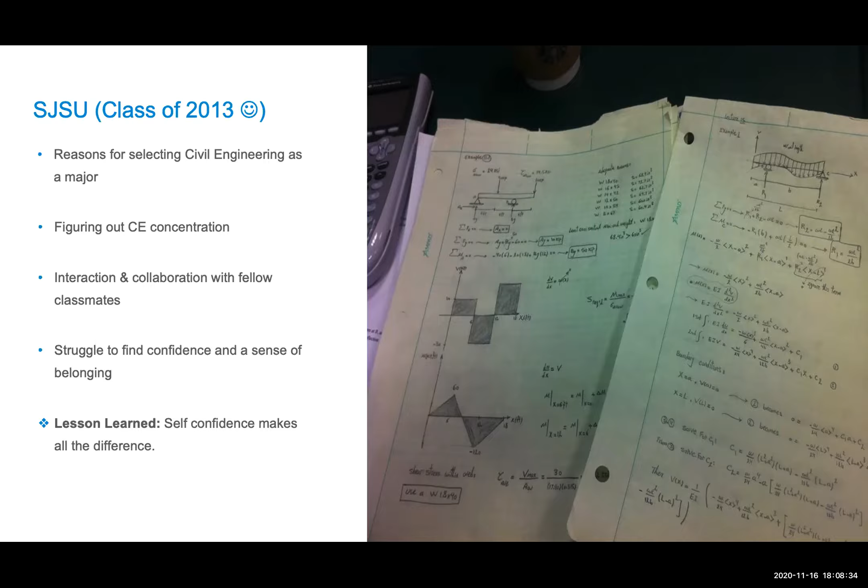Just to be completely open and vulnerable, that lack of interaction really resulted in me having pretty low self-confidence and a sense of belonging, which impacted my attitudes towards my studies. I would just come to school, get my stuff done, and go home immediately right after. That's why I put the biggest lesson learned for this slide: confidence makes all the difference, whether it's at school, your career, or generally in life. There are easy steps where you can start developing that self-confidence.

Let's talk about how I started building that self-confidence and sense of belonging, which is actually kind of a funny story. Finally, I decided to take an elective in construction, with Dr. Pian, CE 242 or 140, one of those classes where I really enjoyed all the different concepts we had, from earned value analysis to CPM scheduling.

That same semester, one of my classmates, who was president of the AGC student chapter, asked me if I wanted to join the organization and take on a leadership position as events coordinator for the club. My thought process was, hey, why not? At least I'll get to put this on my resume and it'll look good when I want to go get my full-time position.

So I started really attending all these different events, like volunteer events with Rebuilding Together, Habitat for Humanity, where we helped with minor construction work on homeless shelters, which was a pretty rewarding and eye-opening experience for me.

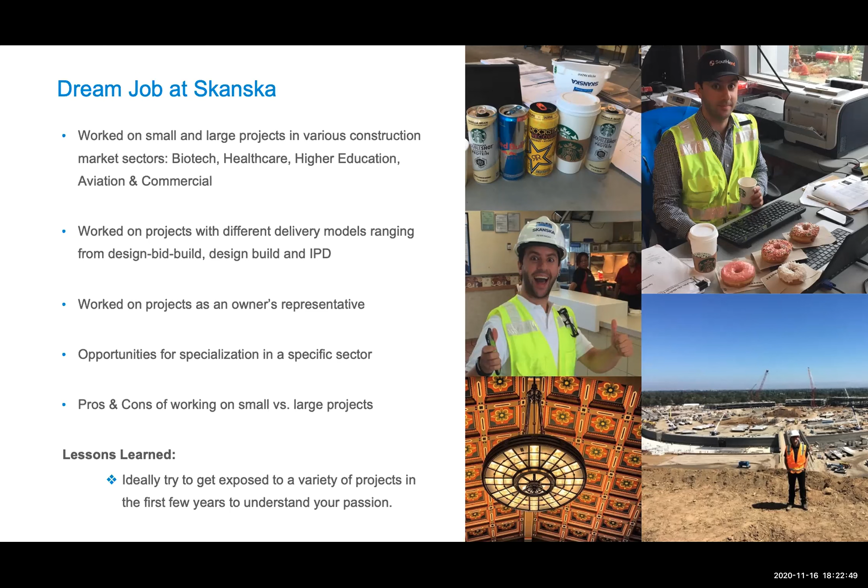Ultimately, what I want to say is being in the field and working in construction is definitely a super rewarding career. You can see from the images at the top, there's often a lot of donuts and caffeine involved, which makes it pretty fun. But aside from all the jokes, it is super rewarding to be a part of the construction industry and that process, and at the end of the project, be able to see the end result and the entire structure or building coming together.

All right, one more slide and we'll get to the construction technology side of things. In this slide, I do want to take a quick moment and reiterate the importance of networking, probably for the 18th time already, and developing those connections early on in the industry.

Because it'll not just help you land that internship or full-time position, but it'll also help you get ahead when you get into your first full-time position with your construction company. So when I had the opportunity as a student to go to all these conferences and hang out with people in leadership positions, I was able to get the confidence to not be intimidated by people in executive levels or the C-suite.

So for example, I had the courage when I started working at Skanska to really go up to my chief operating officer or executive vice president and engage in conversations with them and seek their mentorship. Through that, we were able to develop really long-lasting friendships, which even to this day, now that I'm not even with the company, we grab lunch, play tennis together, and I get to pick their brain on technical topics, how to navigate tough situations at work, and how to ultimately become a better leader for my team during my current job.

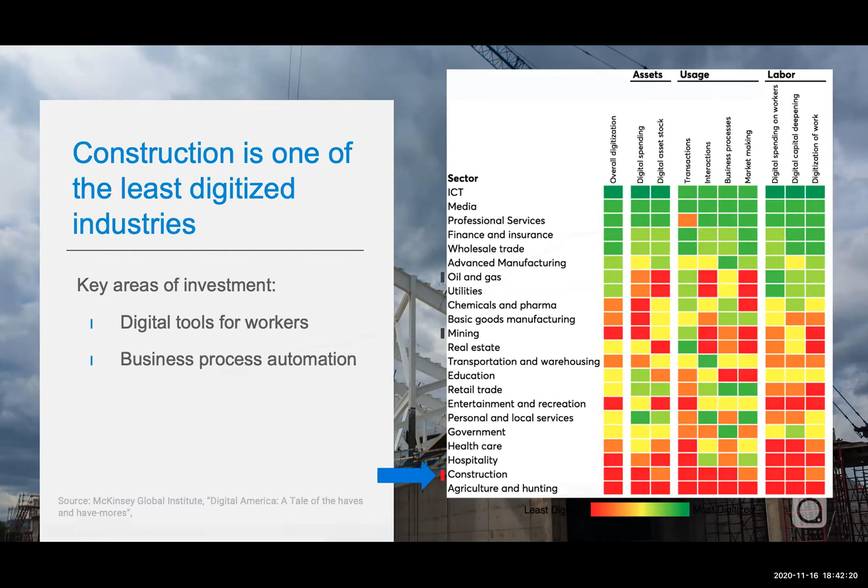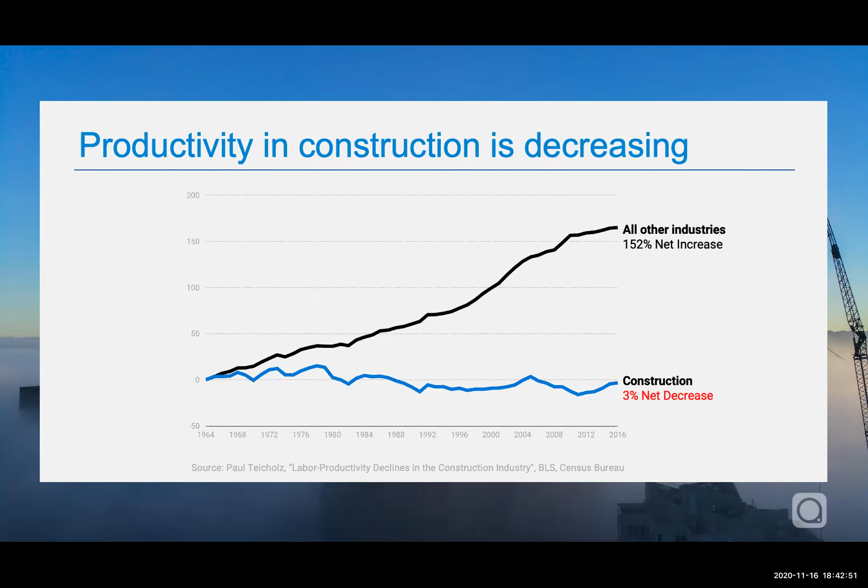So let's take a quick look at this whole challenge we have in construction from a productivity standpoint. As you can see in this chart, productivity in construction has basically been declining over the last 50 years, while it's actually increased by over 150% in some other industries.

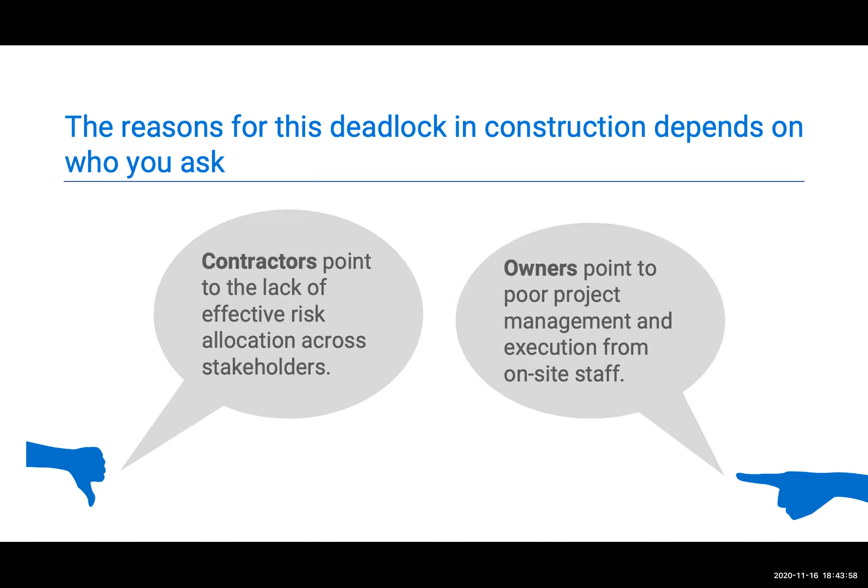And you might ask yourself, what does that finger pointing mean? Contractors point to the lack of effective risk allocation across stakeholders and how they don't have enough skin in the game when it comes to profit margins and setting up these projects. On the other hand, owners point to poor project management and execution from the on-site staff.

All of that back and forth from the previous slide has made us really get used to and adapt to the realities of today in construction, which are high costs, unpredictable schedules and outcomes for everybody involved, and squeezed margins for subcontractors, architects, and general contractors. So at times it is a lose-lose situation for everybody involved.

That results in projects experiencing overruns 98% of the time, with average schedule delays of 20 months, and average cost increases above the allocated budget of up to about 80%. Pretty crazy numbers if you put them into perspective.

A couple more slides here. We ended up surveying 600 industry professionals last year to put together a collaborative study with an organization called FMI. One of the areas we analyzed was the amount of value-added activities versus non-value added activities that project teams engaged in.

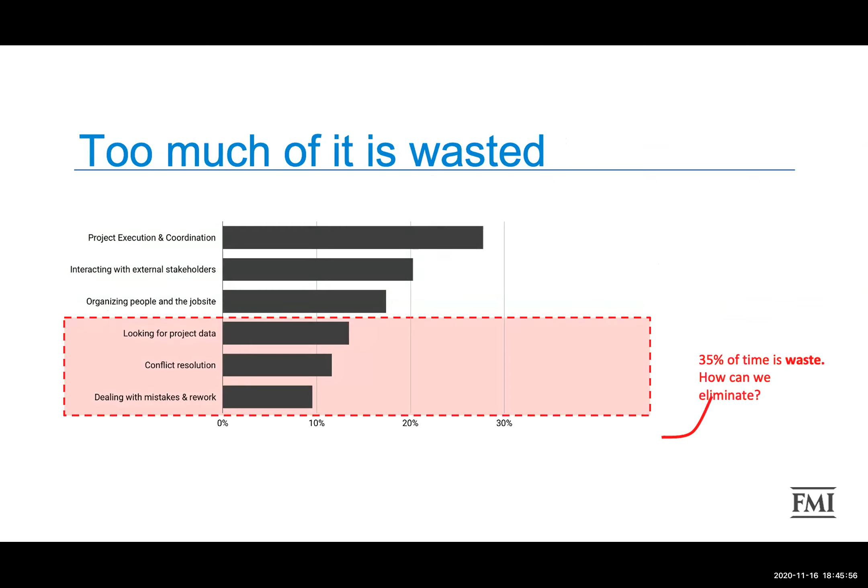Here's a quick breakdown of that 35% waste. Out of the work week, 5.5 hours is spent looking for project data and information, 4.7 hours is spent on conflict resolution, and 3.9 hours is spent dealing with rework and correcting mistakes on projects. Really big numbers on some of these projects we're seeing.

One of the most important parts of a construction project is the closeout and turnover, when subcontractors and general contractors put together all the closeout packages, bundle everything up, and provide that to the owner for the owner and their facilities teams to maintain and operate that structure for the next 50 to 100 years.

If contractors don't have the ability, based on the previous slide, to keep all that information centralized in one environment, a lot of it falls through the cracks. We call this the handover tsunami, where important information falls through the cracks, and the owners and facilities teams receive all this information and have to do a lot of manual data entry to maintain and operate their structures.

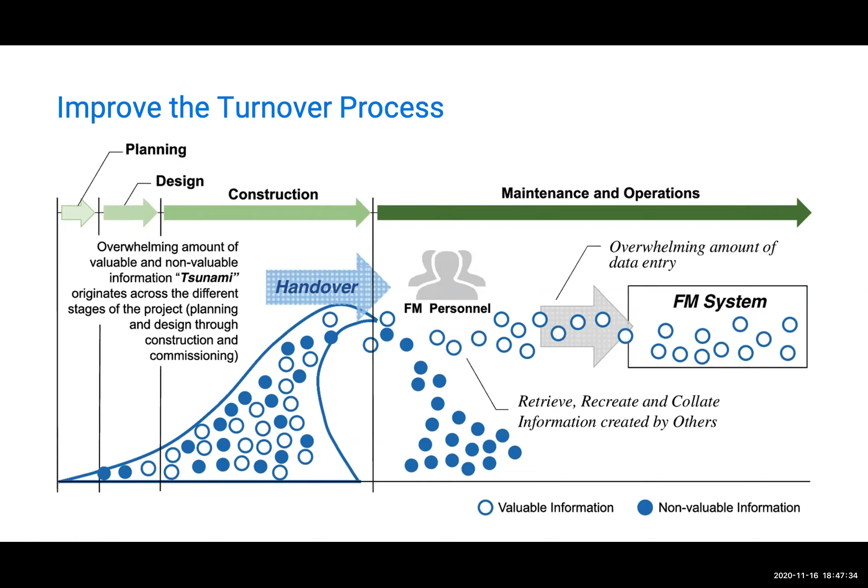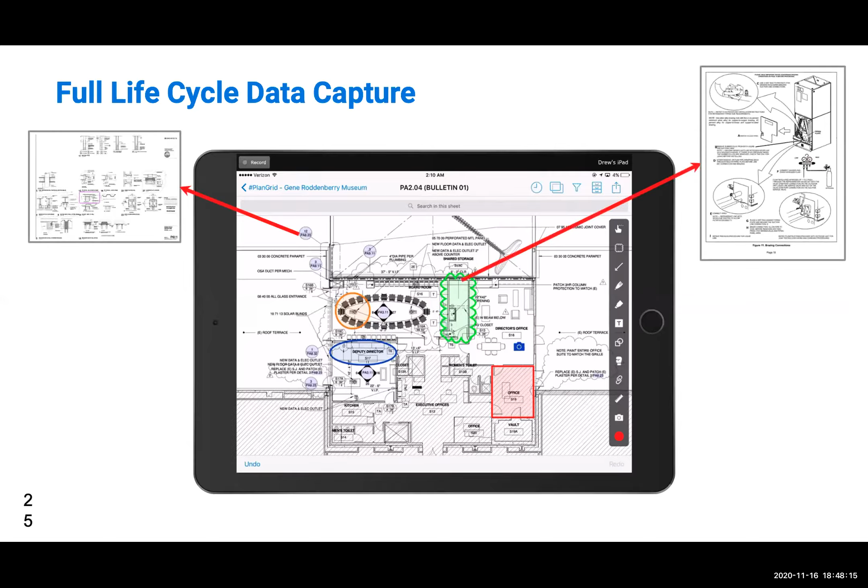That's why construction technology became popular in the past 7 to 9 years, by digitizing everything and bringing it to the field—giving project teams, general contractors, and owners' facilities teams an iPad with all that information in one centralized location. No more rolls of paper all over the job site, no more binders of operations and maintenance manuals—just a mobile device with access to digitized drawings, approved submittals for equipment, progress photos, O&M manuals, warranty information from subcontractors, and training videos for equipment like a generator or automatic transfer switch, all housed in one single source of truth.

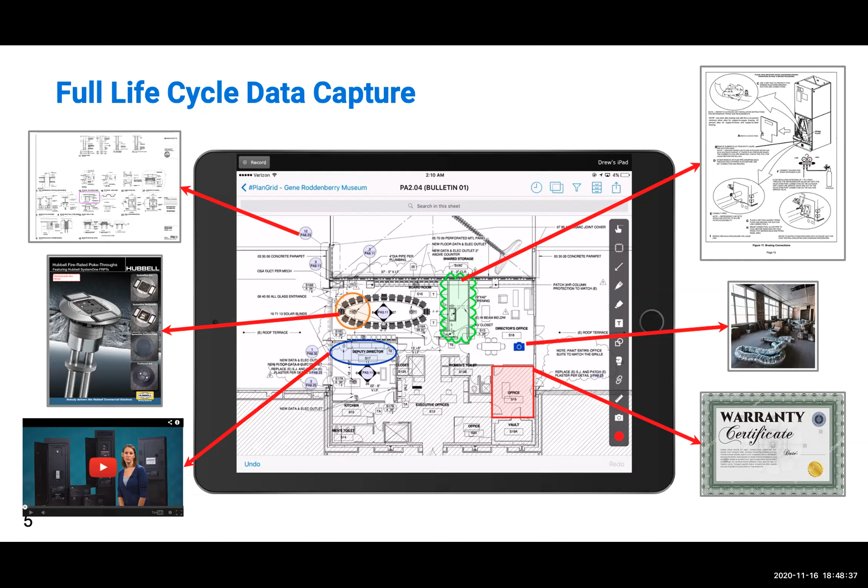I want to dive into my iPad to give you a quick demonstration. Out of our whole portfolio, I'm going to focus on PlanGrid to show how digitization and data standardization can help construction projects be more effective and efficient on the job site.

Let me go ahead and pull up my iPad for us to take a look at. Dr. Pion, can you let me know if my iPad screen is showing on Zoom? Can you see my iPad screen? Yes, perfect, I can see you.

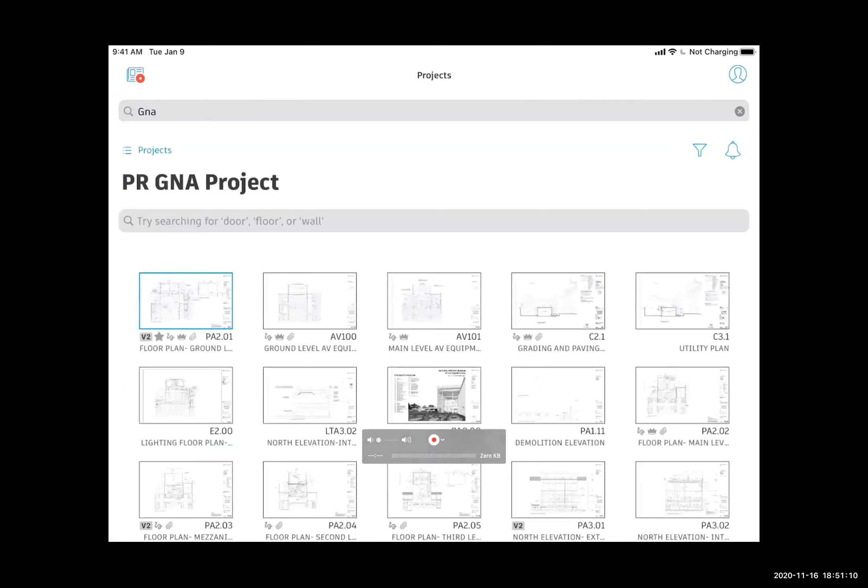This helps customers be a little bit more effective and efficient on the job site. Whenever you load your project in PlanGrid, the first window you'll see is what we call the grid view, which is a list of all of your different project drawings.

To get to this point, our users would have to grab a combined PDF of all their different drawings, drag and drop them into the system, and our OCR technology goes to work in the background, doing a few things automatically for the users.

First, the system is going to automate and separate out all the different drawings from that PDF packet. Then it'll automatically assign all the different sheet titles, sheet descriptions, sheet numbers—everything will be automated for the users.

The system will also automatically place all of these drawings into basic disciplines—architectural, mechanical, electrical, and so on. So I can go to the filter at the top and take a look at all my architectural or audio-visual drawings, and start slicing and dicing the information as a project engineer based on what I want to see on the project.

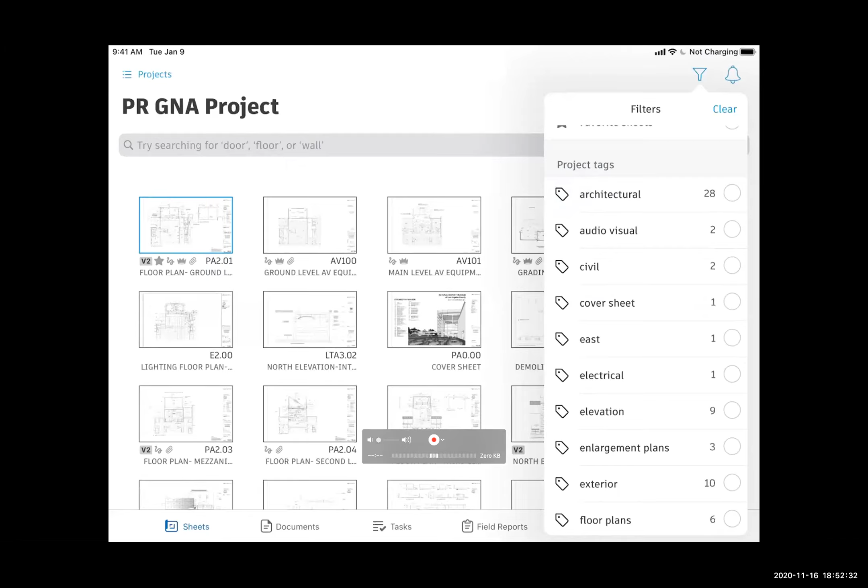With a couple clicks, I can hit architectural, hit floor plans, and really drill down the drawing set from 1,000 drawings to only the 5 drawings I really care about, from a project engineer perspective, going to that job site on a specific date.

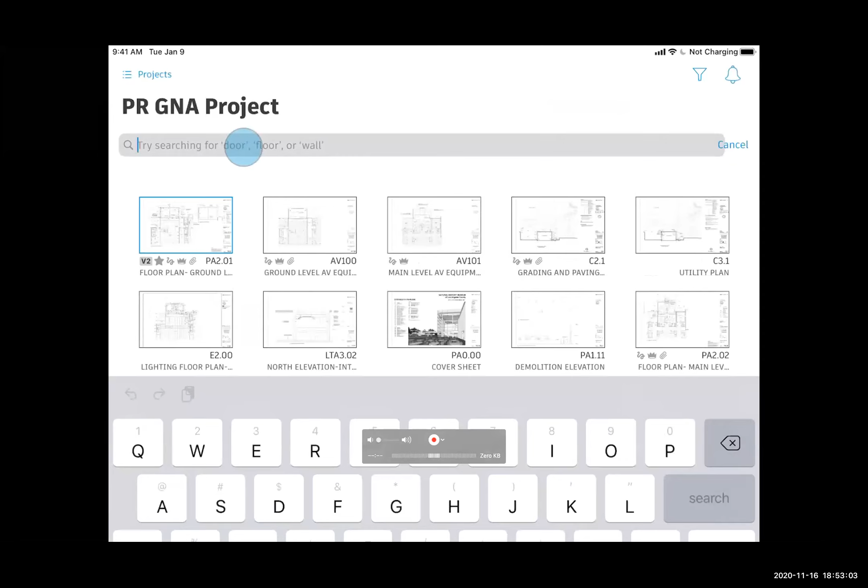Another thing the system does automatically for different teams, which is pretty important, is making the text within the drawings searchable. If you go to the navigation bar at the top, you can search for a specific word. This was super painful for me as a PE six years ago or so, going through drawings searching for specific information.

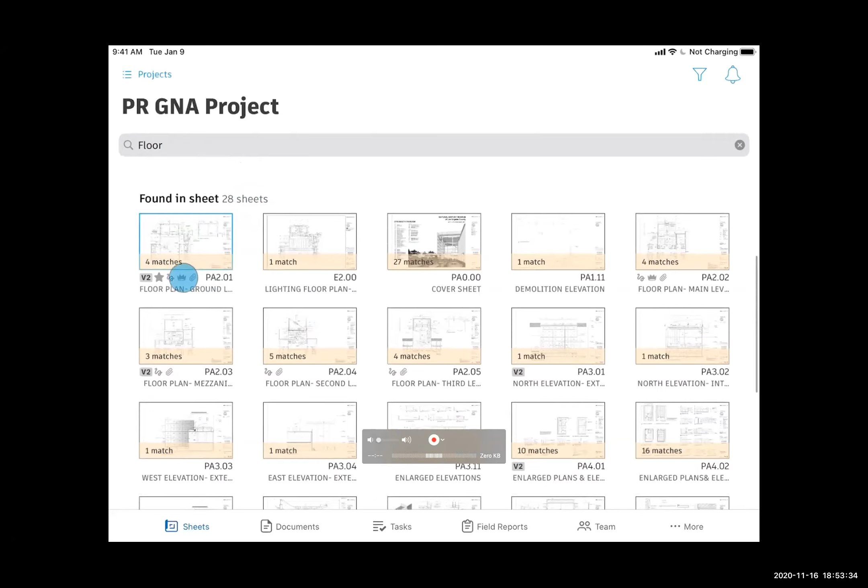In this case, the platform finds the word 'floor' in the sheet title or description of 6 sheets at the top, and it was also found in 28 sheets within the context of the sheet itself. For example, PA 2.01 has 4 matches for the word. I can click on it, and everywhere the word floor is mentioned will be highlighted in yellow for me to look at.

Another thing that I really struggled with as a project engineer in the field before we used PlanGrid or similar technology was being able to look at all these different detail callouts. Going through thousands of pages and sheets of drawings on the job site in the trailer wasn't a really efficient way of going about it.

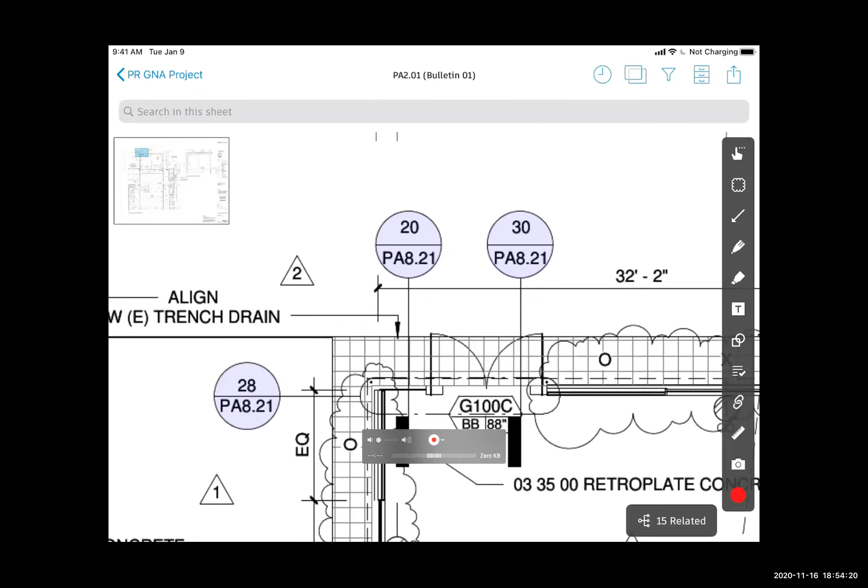So what the system does for you is automatically hyperlink all of your detail callouts. Let's say you're a project engineer starting your first job right out of school. If you want to reference detail 20 on PA 8.21, you can click on it, jump to that specific sheet, and zoom into detail 20. This saves people, depending on the size of the project, 2 to 3 minutes when referencing and going back and forth between details on the drawing.

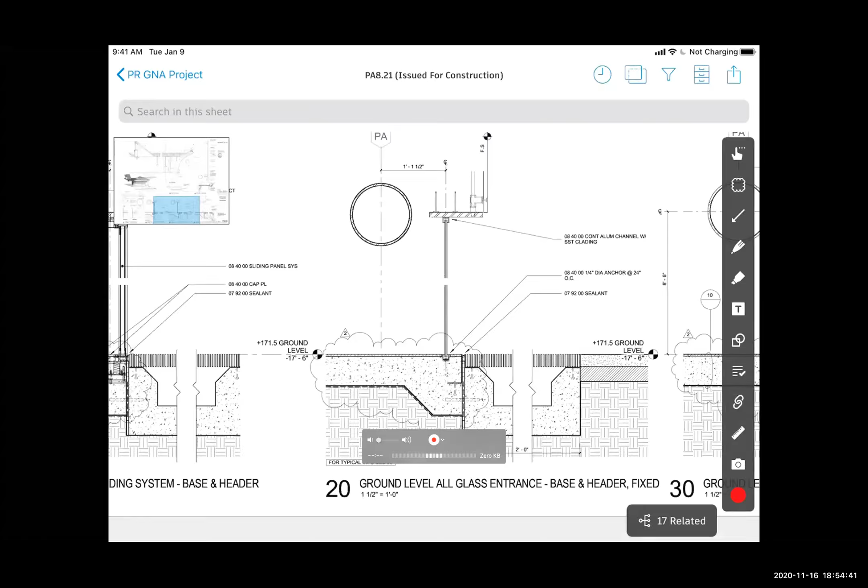In this case, if I want to go back to the floor plan that I started with, in the top right-hand section I have a nice Google-style search of all the different drawings I started from, and at the top we have PA 2.01, the floor plan we started with.

The last automated thing the system does is versioning, the whole version control process. On a construction project there are multiple iterations of design or construction drawings, where the design team issues a new bulletin, a new set of changes to the issued-for-construction set of drawings. You can drag and drop those into place, and the system will automatically slip sheet the new drawings on top of the old ones.

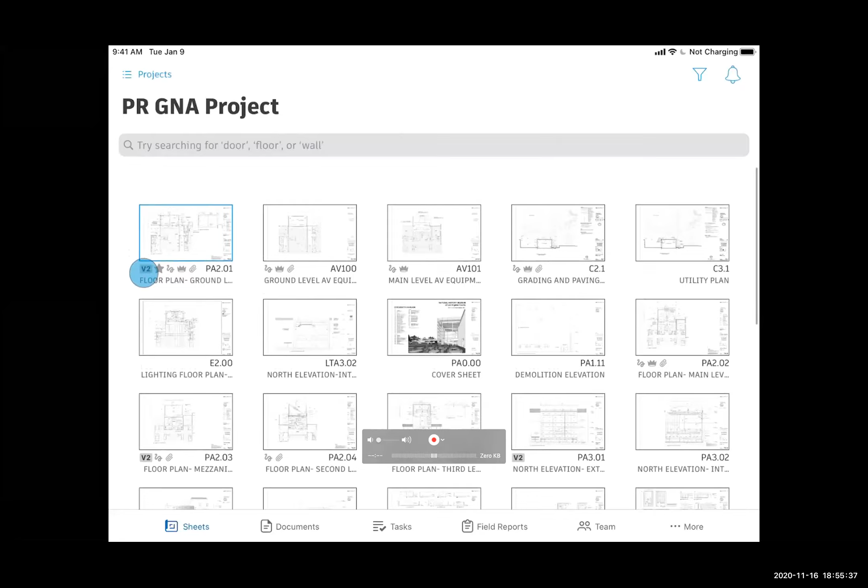You can see we have a V2 designation in the bottom left-hand corner of the sheet, meaning we have 2 different versions of this document. If I click on PA 2.01, the system will always take you to the most current set of the drawing, so all the team members in the field, if you're a project engineer, are always looking at the most up-to-date sheet.

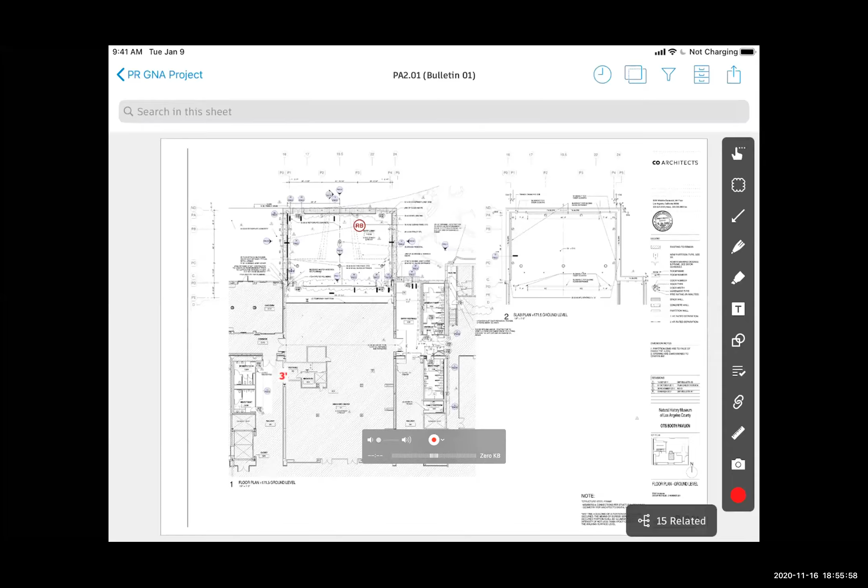If I want to access the older version of this drawing, all I have to do on my mobile device is swipe up. I'll get a banner at the top showing me I'm looking at an older version of a drawing, and in the top right-hand section I can compare this with the most current set of the document.

As I click that, we get a nice legend in the top left-hand corner showing everything in red is from Bulletin 1, the new version of the drawings. Everything in blue is from the issued-for-construction set, the older version. Everything in black essentially stayed the same throughout these iterations of construction documents.

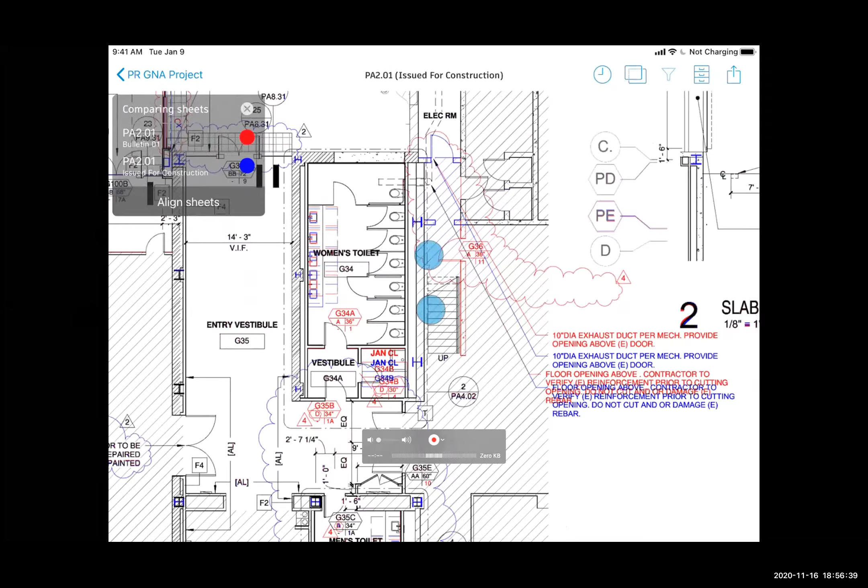For example, if we zoom in here, we can see everything in red, which is new - we had this door and wall system that got added. If I go into the women's restroom area, you can see some of these sink locations also changed throughout the different construction drawings.

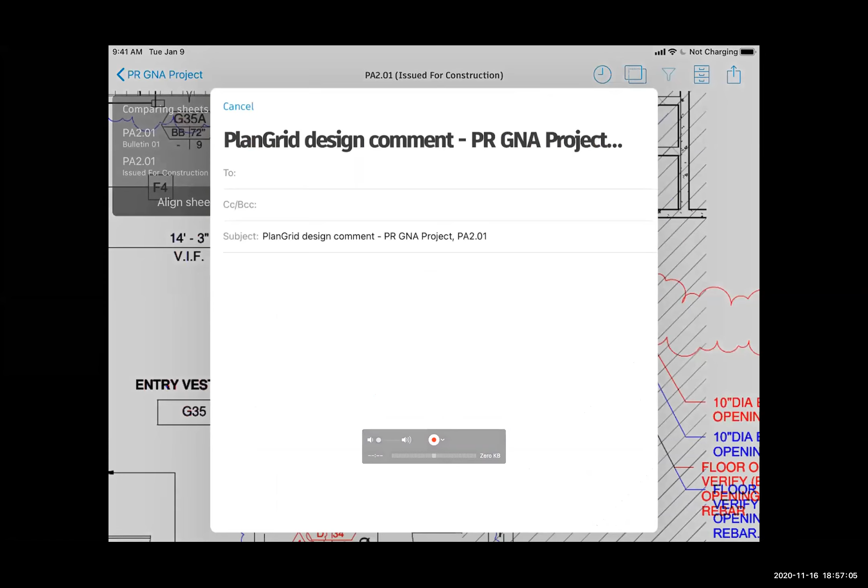If I want to communicate this to different parties, I can click the square with the up arrow, take a quick snapshot, and email it out, saying we're going to need pricing now for all these sink locations that have already been roughed in and now moved with the new iteration of the construction drawing - eliminating a lot of Word documents, Excel files, emails, and back-and-forth conversations in one centralized location.

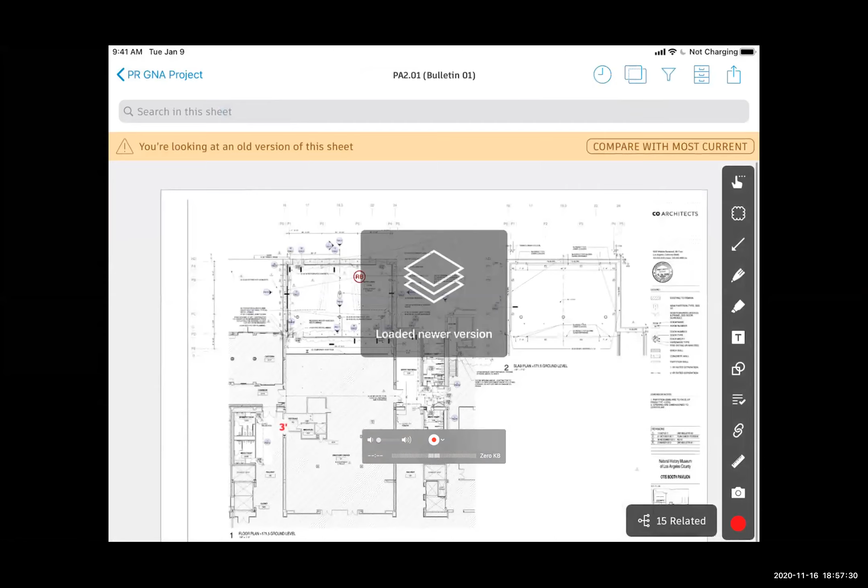A few other things to show: you have the ability to use the annotations toolbar here in the right-hand section, where project engineers, project managers, and superintendents can grab different icons, annotate the drawings, and use the Sharpie tool.

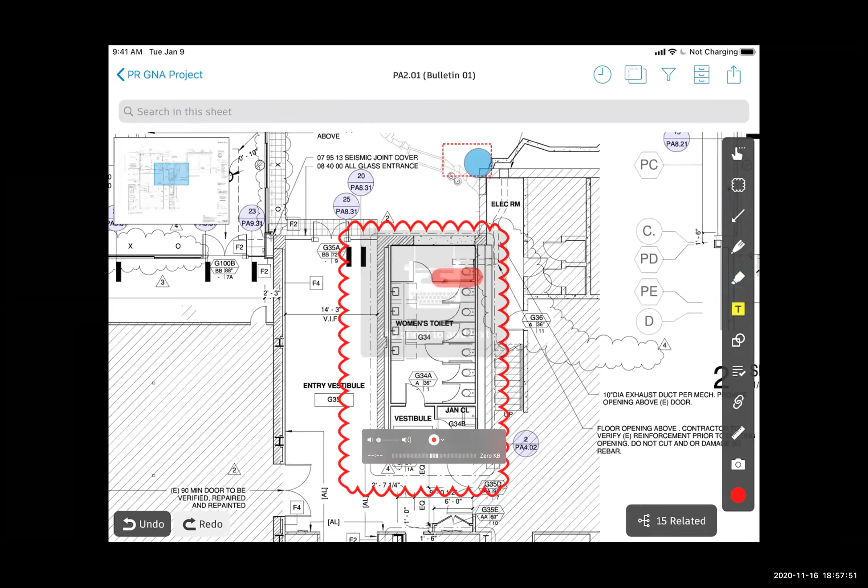Let's grab this toilet partition over here in the women's restroom. You can use text boxes to do talk-to-text functionality, or type something, let's say 'field verify' in this particular case.

The important thing customers are really starting to like when it comes to construction technology is that all of these annotations and markups I'm creating are personal to me. So as a project engineer, I can treat this as my personal notebook for a given day on the job.

But if I want to share all of this information with my team members, I can grab all these annotations and publish them to the project. You can see the crown icon appears and the red color gets a shade darker, meaning everybody on my project team - owner, contractors, everybody - can now see all this information I've published.

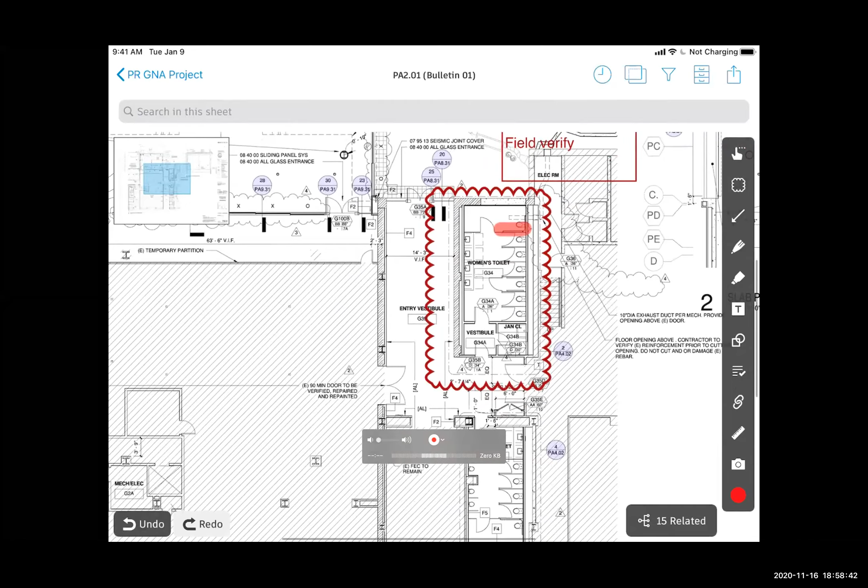A few other things to note: you can also use what we call our chain link icon over here, which is for hyperlinking.

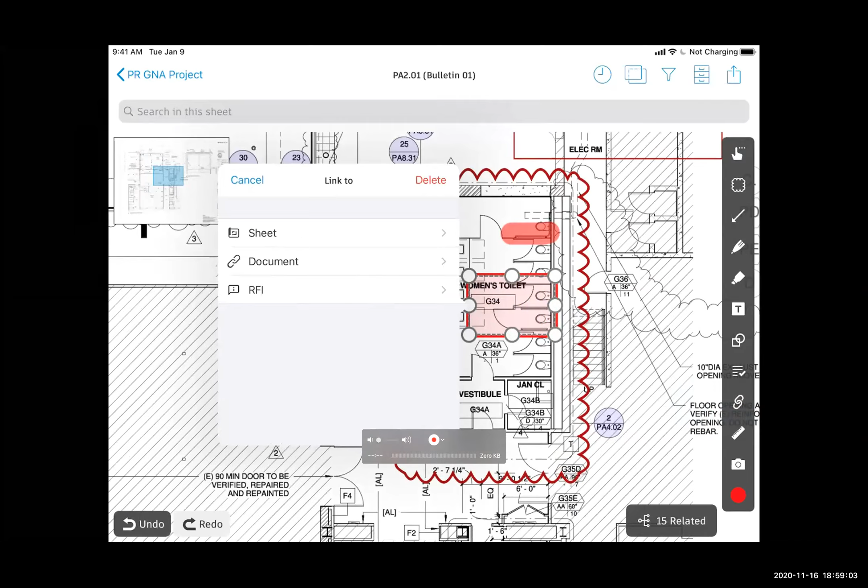For example, I can grab a specific shape and go to this toilet partition area and reference product data for this specific toilet partition on the project. I can click the documents, go to the toilet partition document within our PlanGrid project, and publish this. So superintendents or project engineers can pull up this toilet partition cut sheet, whether on the job site online or offline, and make sure all the products the specialty subcontractor is bringing match the specifications the architect has specified. We have all the information connected in one centralized location to make sure the right things are being delivered and installed.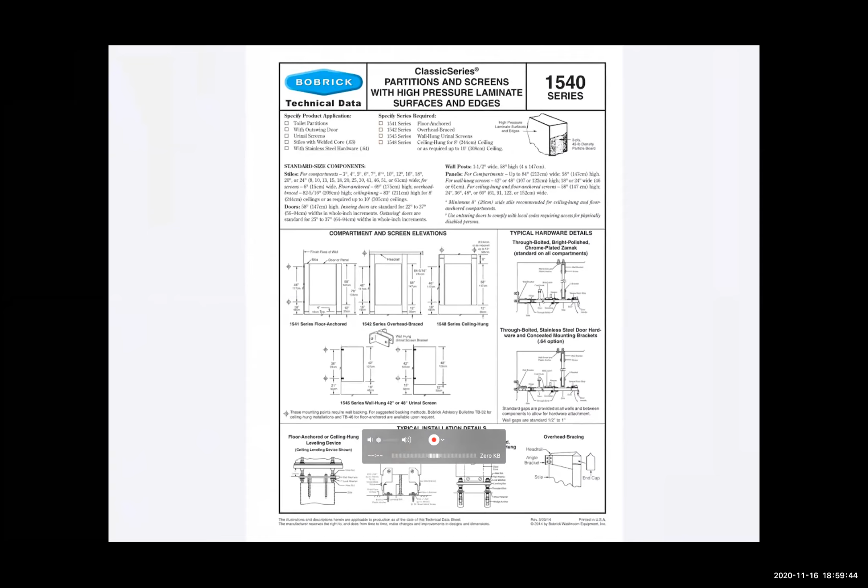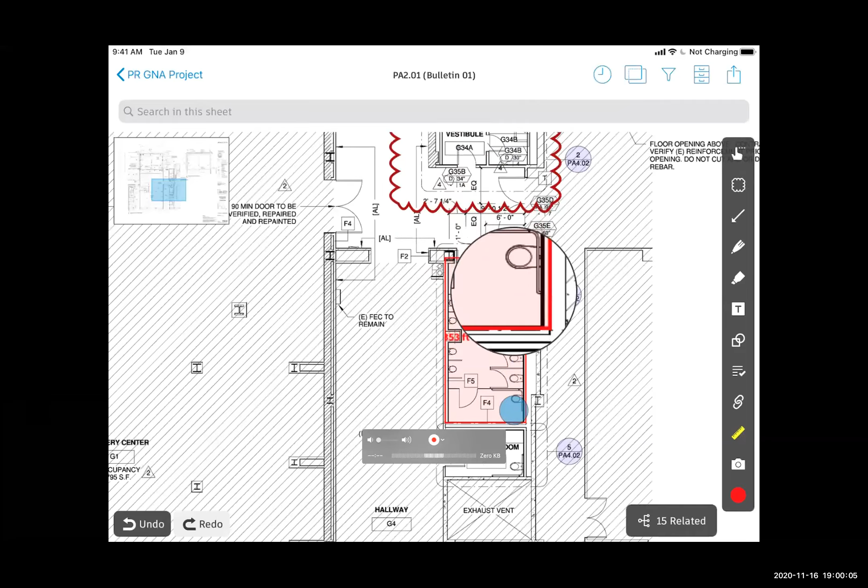A couple other things to point out: you have a measuring tool. Instead of doing anything manually, you can calibrate your drawings, run irregular shapes, do linear or area measurements to take a quick perspective on, say, how much red or caution tape you're going to need, or what your laydown area is going to look like from a logistics standpoint on the project.

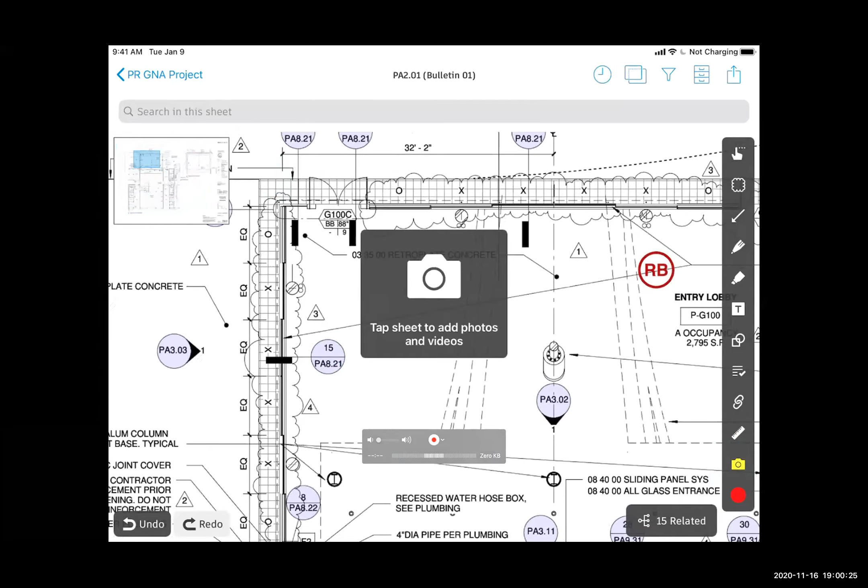The most important functionality that I really enjoy is the progress photo functionality, which is super important for project engineers. As you start your career, more often than not every Friday you'd have to go to a specific location on the job site and take pictures to document the progress of the work for the owner. This is critical to make sure that as a subcontractor or general contractor, you're getting paid at the end of the month accordingly.

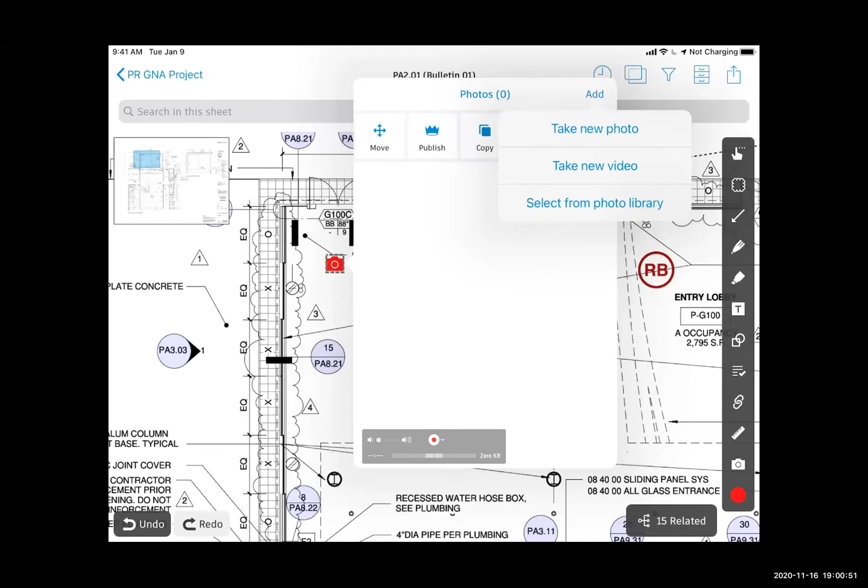As a project engineer, I can take a new video or photo from a specific corner on the job site, and I can annotate that photo. If I go to the details section, the important piece is that everything is date, time, and user stamped. So you have that nice audit trail of who's taking the picture, when it's being taken, and the exact time and location, with the GPS latitude and longitude for the photo.

If worst comes worst, if there are legal issues on the project from a liability perspective, contractors can cover themselves and make sure they have all the backup documentation of when this work happened. And with the GPS location, now everybody knows exactly where I live.

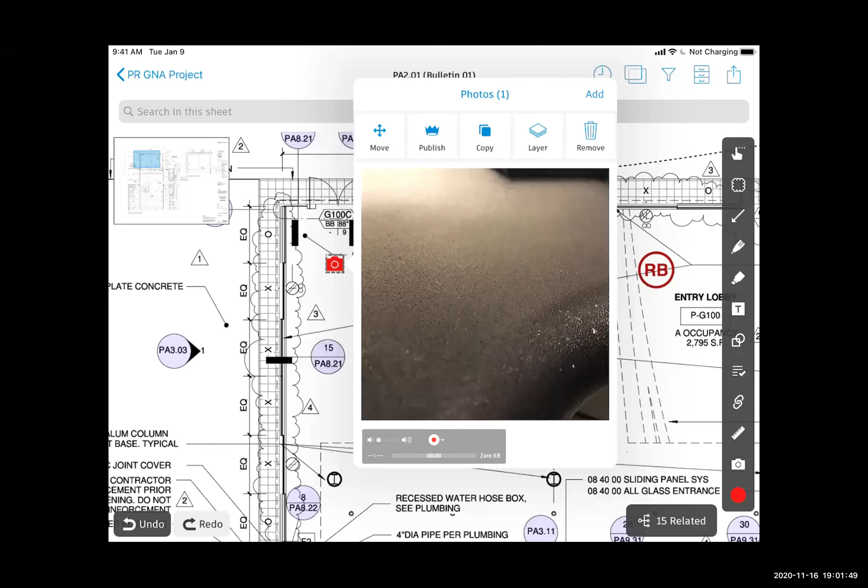Next week rolls around, and as a project engineer you go out there and take a new photo, building your progress photos for this specific lobby area, so you can see how this entire space and location progressed throughout the past two years that we've been building this project.

Now going to the document section in PlanGrid here in the bottom section. This is where a lot of folks in the construction industry are leveraging their internal C drive, Box, Dropbox, SharePoint, or Google Drive as just a repository. With construction technology, not just PlanGrid but many others, our entire mission is to connect that data repository to the sheets the way I showed you, to hyperlink them and use that relevant information in the field.

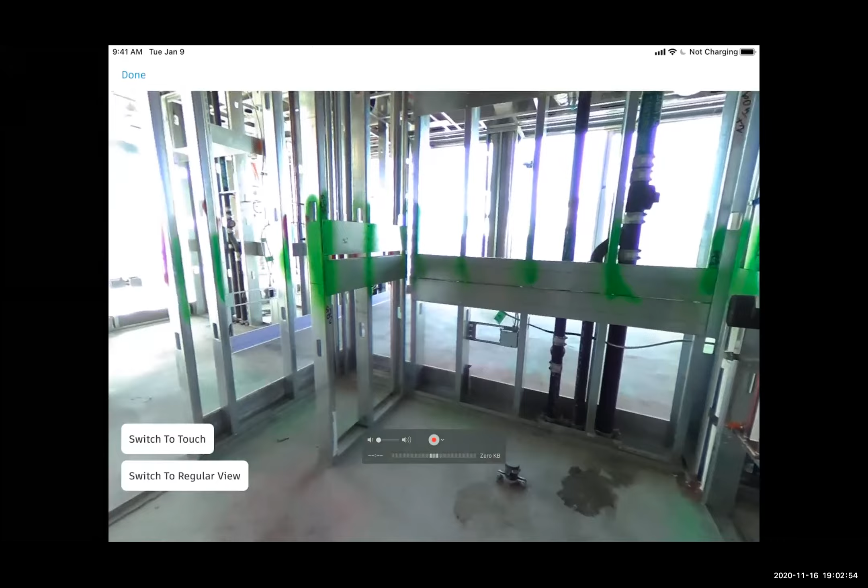In this particular case, under my document section, I can take a look at 360-degree photos prior to room closures on the project, to make sure we're roughing everything in accordingly and getting all the work completed. You can have all your approved submittals or approved RFIs as part of the process. If I click on the wiring devices submittal, I can easily go through the documentation, very similar to the sheets functionality I showed you. This is very valuable for project engineers in the field to search for information, and wherever a word, say 'commercial', has been mentioned, it'll pop up in yellow for me.

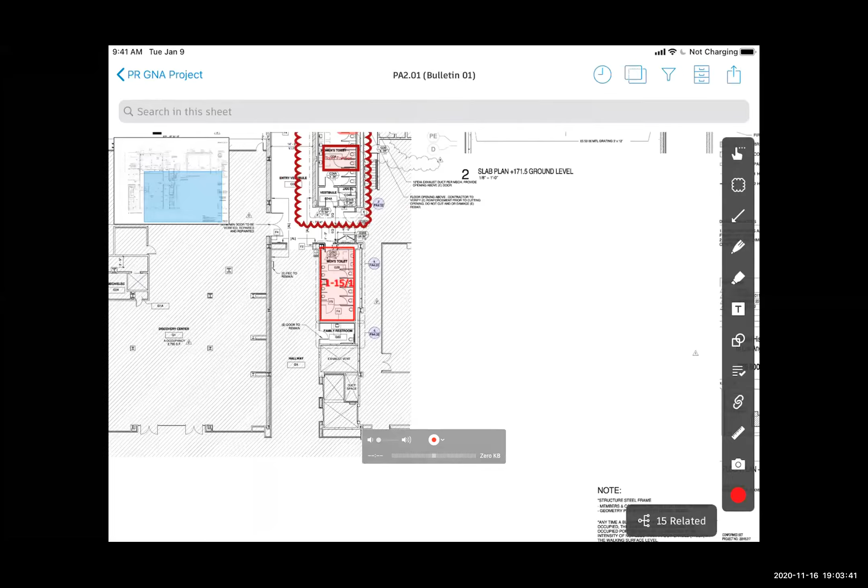All right, a few other functionalities. I'd say this is probably the most heavily used functionality within PlanGrid: our project lifecycle task management tool, represented by the four lines and a check mark. As a general contractor, architect, or owner, I can access a fully customizable set of stamps to create an actionable workflow for design reviews, constructability reviews, value engineering exercises, or a simple punch list process on my project.

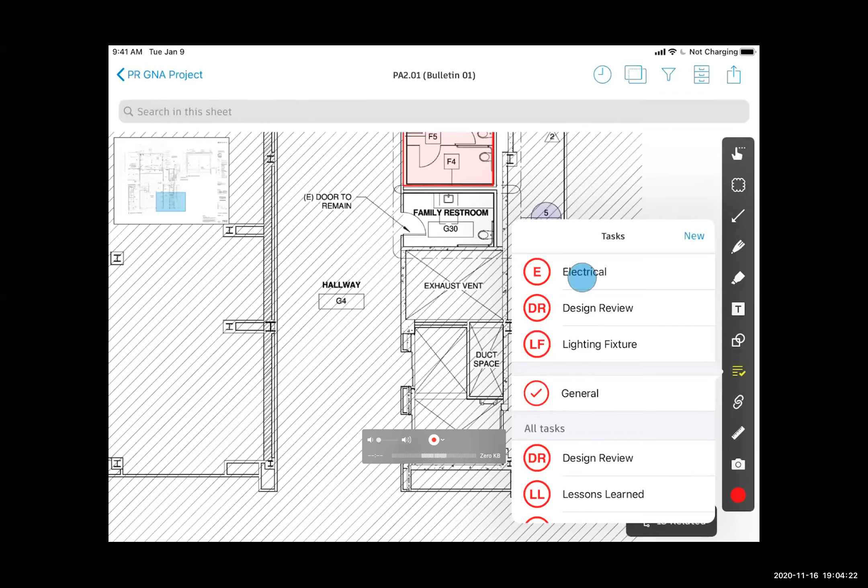So let's say as a general contractor I find a deficiency item from the electrical subcontractor. I can grab this electrical stamp and place it exactly where the issue is located, give it a specific status, and assign it to the electrical subcontractor, let's say Brian, who messed this up. I can include a watcher, like Brian's boss Austin, so they get a notification too, and start creating that actionable workflow.

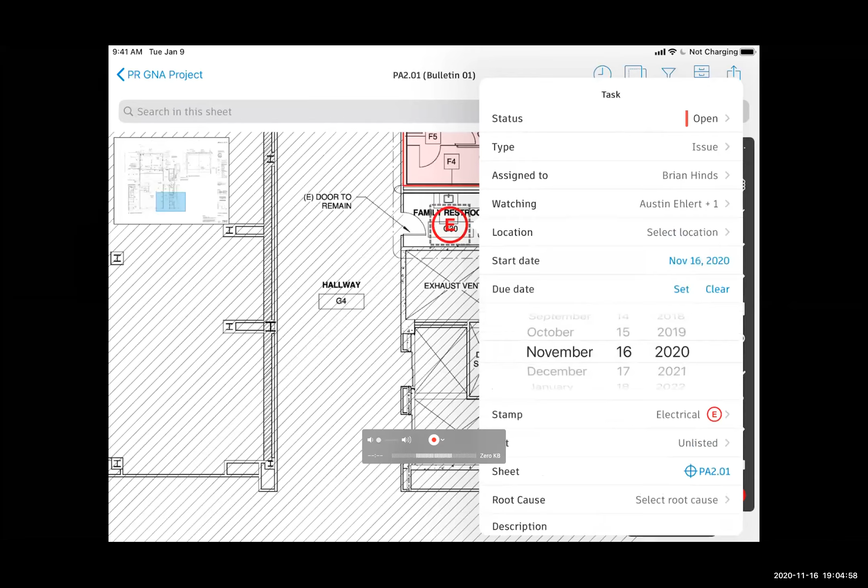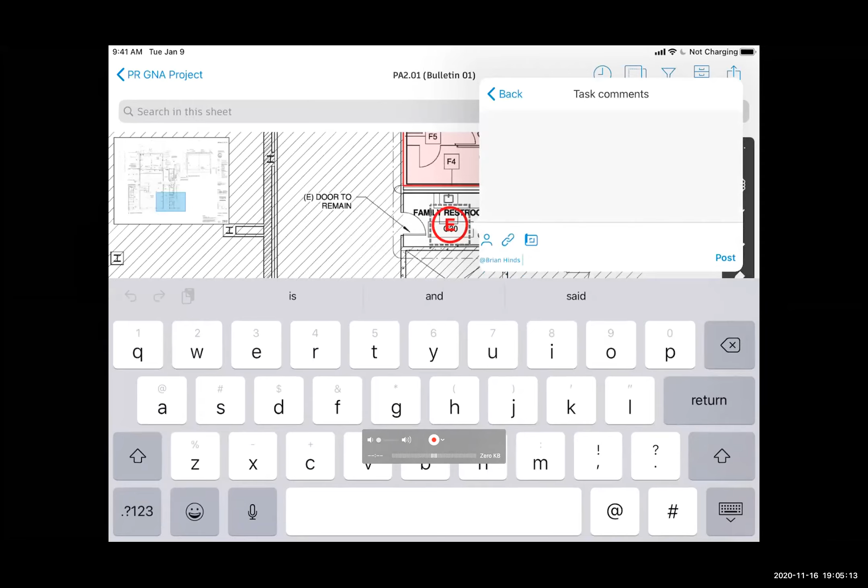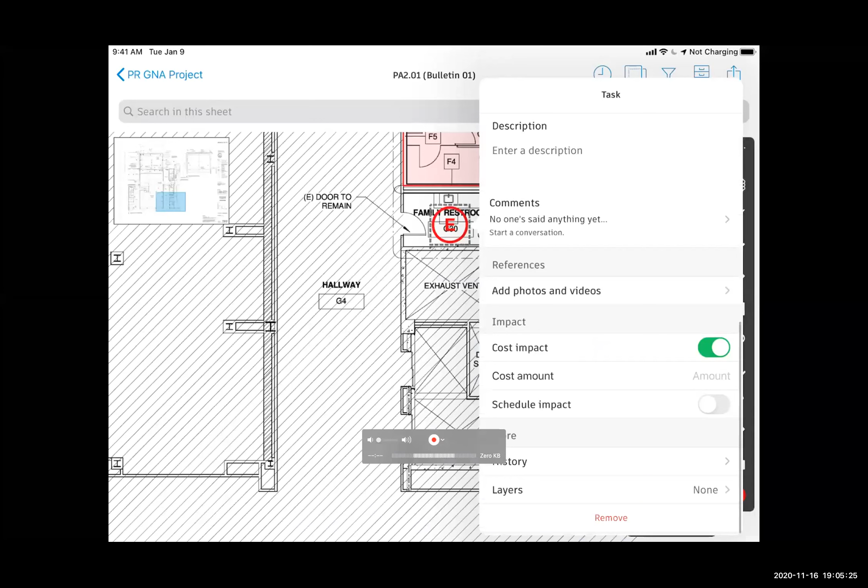So instead of having an Excel log to track, or having a superintendent manually track these on the drawings, I can set start dates and due dates for when the activity needs to be completed. I can include a description of what electrical issue needs to be fixed, and have a live chat conversation between team members to make sure the issue comes to resolution. At the end of the day, I can include photos or videos, and cost or schedule impact for the owner or other stakeholders.

What happens is Brian, the electrical contractor, receives an email that he has a task assigned to him that he needs to take care of based on a specific timeline. The important part that gets automated is the generation of all these reports. As a project engineer, this was always a huge pain point for me, having to keep track of all these items in an Excel log.

But you can generate a report that automates all of your tasks throughout the project. These are all hyperlinked so I can jump from punch list item to punch list item. I have a 2D snapshot of the drawing showing the exact location of the task, along with all the metadata, comments, descriptions, and photos taken as part of the process - everything including date, time, and user stamp, so we don't have liability issues moving forward.

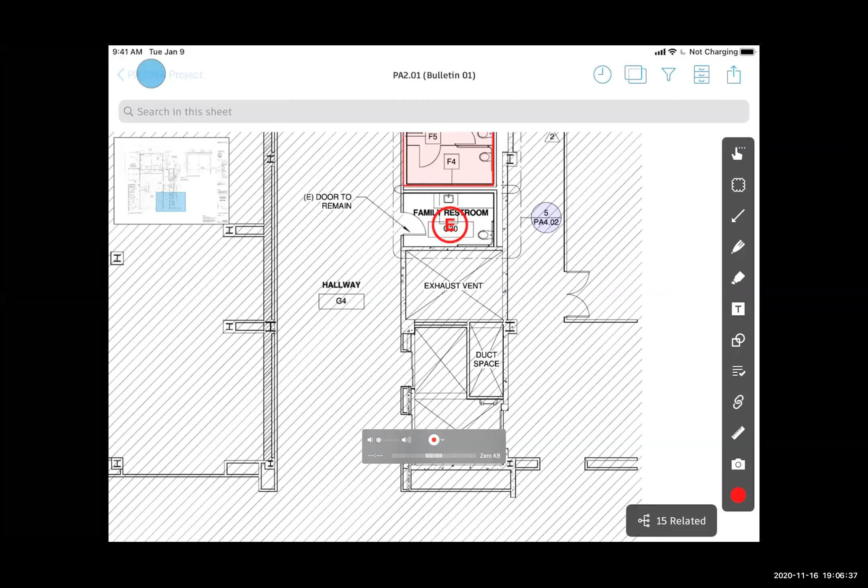Alright, the last part I want to show is automating and digitizing the field report process on projects. This is important because as you do more projects, whether as a subcontractor or general contractor, you'll have a lot of different checklists or forms to create, especially in the COVID world, to make sure people are doing social distancing and all the measures needed for COVID purposes. Safety forms, commissioning forms, QA/QC forms can all go into construction technology tools like PlanGrid and be digitized.

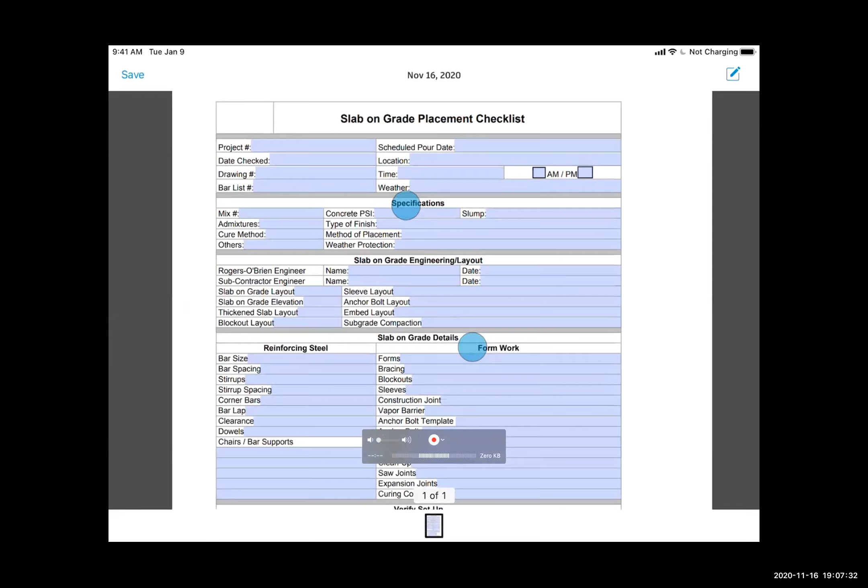Instead of having a project engineer or field superintendent fill them out on paper that gets lost, you can hand them an iPad and have them fill out a slab on grade checklist form. I can fill out specific sections, use checkboxes and drop-downs, and at the end of the day have all the different parties do their digital signature. I also have access to weather information throughout the course of the project.

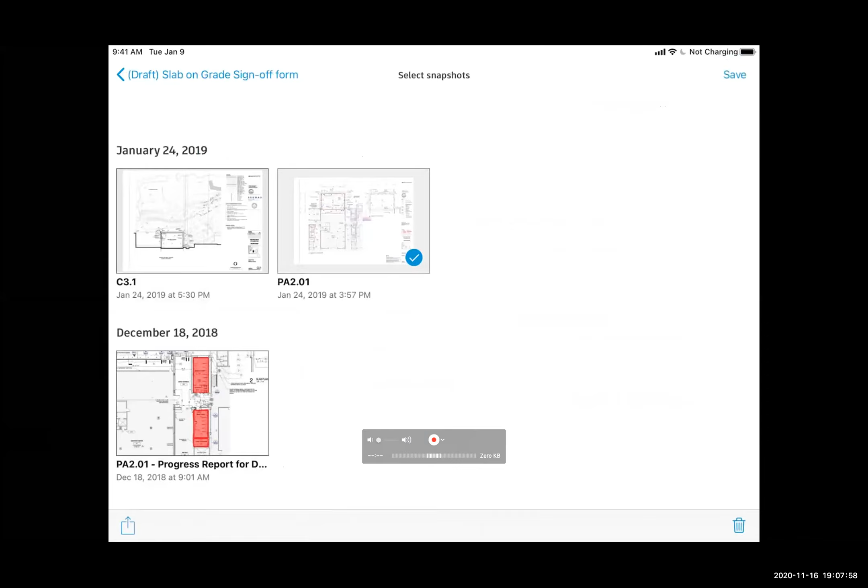I can add any photos or videos, bring in any documents like hollow metal door submittals, and bring in any snapshots, such as that overlay we did between different iterations of design. At the end of the day I can also add any tasks we created, maybe that electrical task I just generated. So all of this information can be housed as part of the field reports we're creating, whether our users are owners, contractors, or subcontractors.

You can submit this so the information goes to the higher ups and leadership on the project for them to review and accept the report. So I know I went through all this information quickly, but these are some of the really basic value adds where you can do all your RFIs, submittals, change management - basically the entire project lifecycle, from planning all the way to turning over the project to the owners and how they operate it for the next 50 years.

That process is becoming more and more digitized in the past 7, 8, 10 years using construction technology. Dr. Pion, I know that was a really quick demo, but I wanted to get all the capabilities in, because different folks in the class, if you go into construction, you're going to start leveraging all these different construction technology tools out there.

Yeah, thank you, Peter. So PlanGrid started as just a construction drawing app. Now it's a construction management app, a field management app. So it's field management, punch list, RFI management, submittal management, and basically project lifecycle task management for design reviews and constructability reviews and so on.